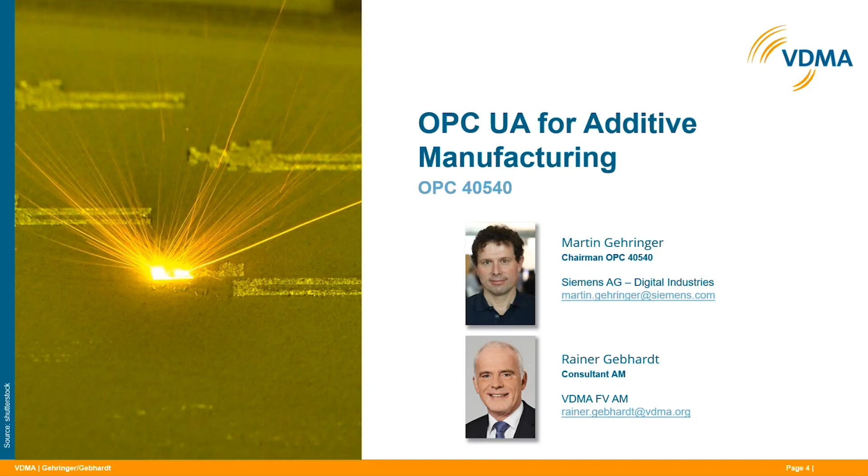Our agenda for today: the first part, my part, is the introduction to additive manufacturing, some short insights. Many of you are familiar with this topic, but perhaps we have an overview just to see again what's important. Then allow me to introduce our working group within VDMA, and then Martin will present the details about what we have done, why OPC UA, what the specification is, and the different topics we have. At the end, a short conclusion and outlook, and we are happy to continue with the discussion together with you, question and answer. Götz is also with us here as someone who has much experience with OPC UA.

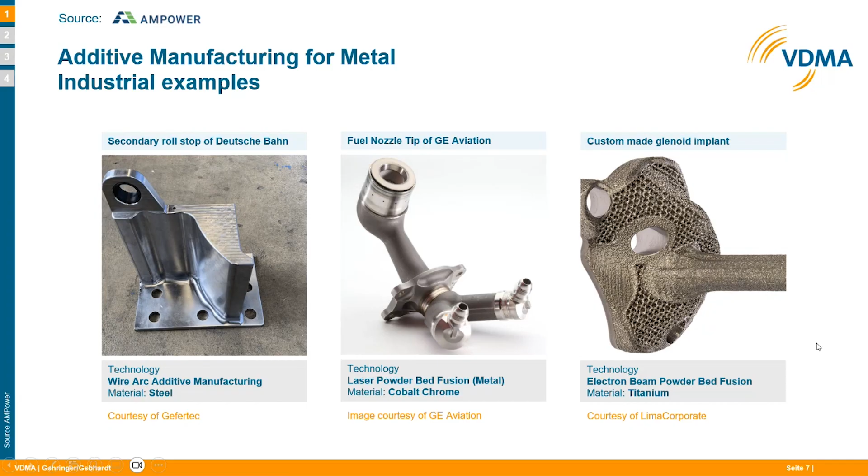And these examples were all produced with different technologies. In the plastic production, it's similar. They have different technologies. Also, the powder bed fusion. In this case, it's a little bit different because you melt and merge the particles. It's not as much energy as with the metal, but the same principle.

And then the material extrusion, very well known with plastics, and different variations, like from Arburg, where you use not a filament, but you use granulate, and you add only droplets on the surface of your part to build up the geometry without any tool. And material jetting is very well known. It's an inkjet principle to build up, often with a UV curing system.

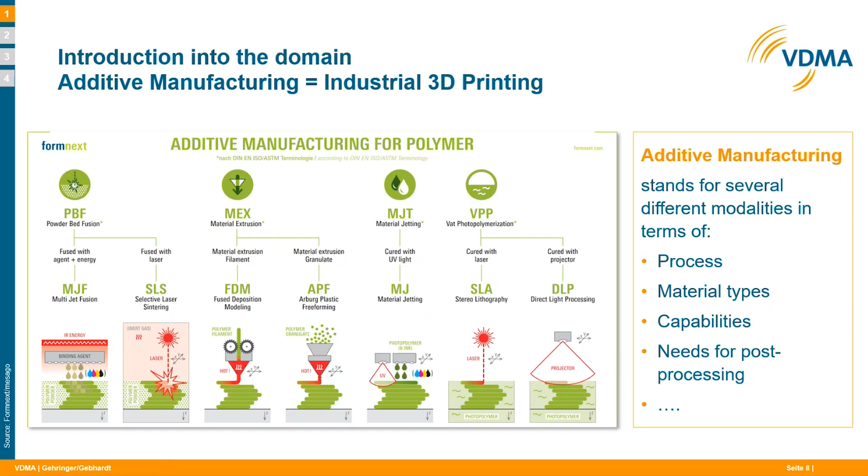Vat polymerization, that's the UV system with the photopolymer curing by laser energy in the wavelength, or even with direct light processing, meaning a continuous process where you build up droplets, or in this case, inside of a whole volume, where you build the part by adding this energy by UV light.

And the examples you see, plastic has a wide range, perhaps even you have at home, but this is not the point of industrial production. But eyewear, for example, is a typical example for personalized, customized products. And this is a very good possibility with laser powder bed fusion to build personalized eyewear, which is really added value for the business.

And the example in the middle here, this coupling hub, a part with mechanical function. AM is used because only a small volume of these parts is necessary. The tool for production, an injection molding process, is expensive, so additive is a good solution. And at the right side, this solution for ship dashboards, which is normally designed in a flat panel. This is also adapted to the real needs of the customer. And this freedom of design with additive manufacturing is the reason to use it.

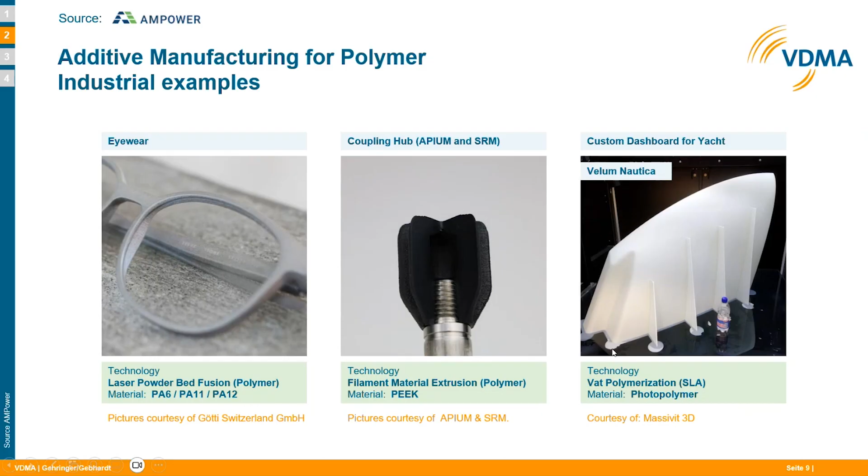Yeah, and I've been in touch with AM for 10 years, and we are doing it within VDMA. And what we see is, okay, the industry is growing, but there's really a big difference. You see prototyping without molds. Yes, it's an improvement for research and development in the industry, very successful, and often the door opener to be in touch with the technology, but it's not serial production, no volume.

Manufacturing tools, there you have a real advantage, because much more performance and quality is possible using AM technology. But more and more we see, and we hope it will grow in the future, and we need automation for this, the production of spare parts, digital warehouse. For example, Deutsche Bahn is using this, it's growing this business, and surely improvement of products and performance by functional integration, for example, flow optimization, process technology.

There are so many solutions and so many things which at the moment are not really used, but we hope and we are sure that this will be the technology for the future. So the transparency, which is written here, of the added value of using AM is necessary for the success and the industrial use of the technology. That's why we present the technology everywhere we can.

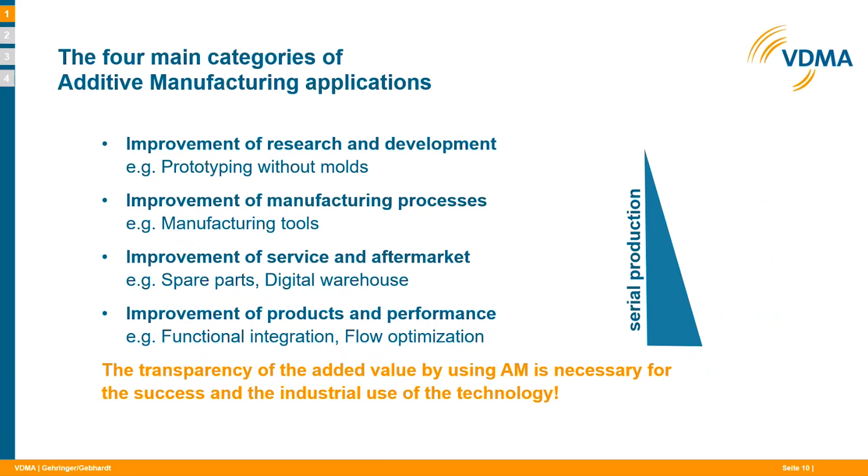Yeah, so just have a short look at our working group within VDMA. We started 10 years ago, as I mentioned. We now have more than 200 members in our group, really representing the whole process chain. We will see it on the next slide, but it's so important to understand that there are different technologies and the possibility to use different materials. You need the suppliers, you need the partners just to realize it. And so this network in a group with all these participants is very important for success.

Our main topics are on the industrial use of additive manufacturing with our mechanical engineering companies within VDMA, but surely for our companies to use it in their production of machines and their design, to understand what's possible. So the working groups are focused on industrialization. One part of this group is OPC UA, or quality and standards. Looking at sustainability, a very important point, the possibilities with additive to produce lightweight parts.

That's very important. Surely we need training, we need education for young people to understand the possibilities and to think additive. New markets and new applications. The visibility and networking with the industry as supplier and user of the technology to have a growing awareness and acceptance of AM.

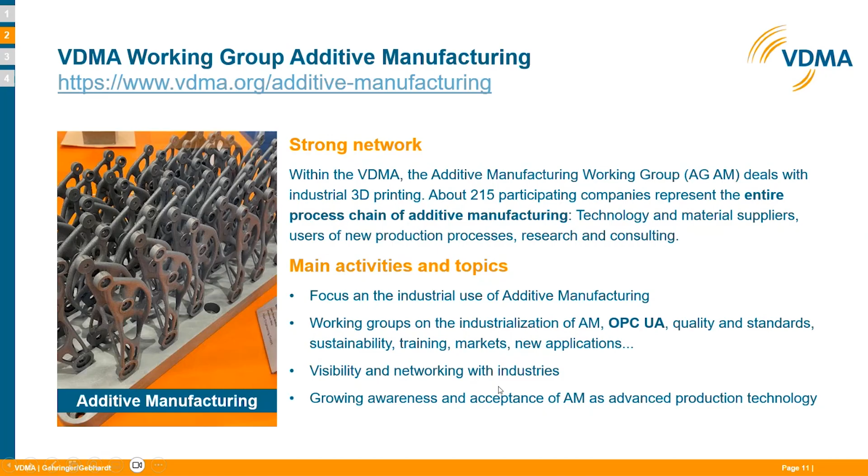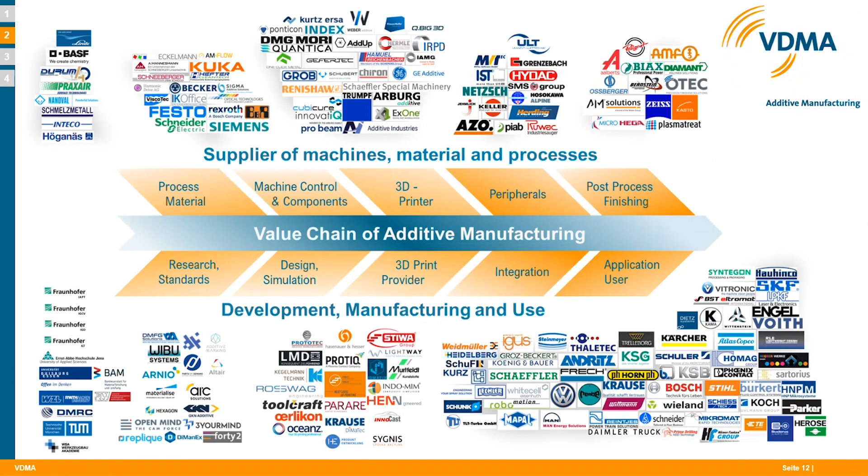This understanding of the process chain is important for industrialization. We are working in one group together - Martin is also with us in this group - with the aim to have a smart factory with AM, an intelligent production chain where you start with the idea of how to use AM, the concept, and then optimize the pre-process, meaning design, for the best way to produce, because sometimes you have support structures or several steps in post-processing. You even have to optimize the additive manufacturing process itself to get the best quality and result.

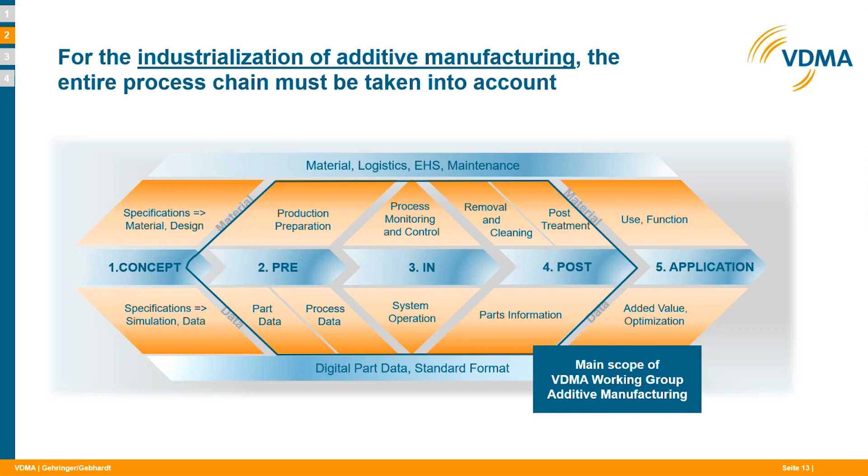Then the post-process, where we need automatization - often it takes the same work time as the entire AM process. And then there's the understanding of the applications and the potential of how to use AM. So this is our message, which we transfer to our companies: understand AM and use it in the right way, in an industrialized way, meaning quality and volume.

So I would like to hand over to Martin, because now we are in the next part of the presentation: why OPC UA. I hope it was possible to give you a short insight into the technology and how we work together.

Thanks, Rainer. Yes, so after the introduction and some examples in the VDMA working group for additive, we want to look deeper into the main topic for today's session, OPC UA for additive manufacturing. And here the starting point is why that is a topic, or becomes a topic.

As shown, additive manufacturing technologies are more and more applied for really printing end parts, which are part of products in the end. This means it becomes a real production technology which has to fulfill all the same requirements as conventional production technologies - so integrating machines on a shop floor, on a brownfield or a new greenfield, is something that has to be supported. So data integration must be as easy as possible.

Currently, the additive manufacturing machine-to-machine communication, or also the connectivity to MES or cloud systems, is driven by proprietary communication. Each vendor brings his own communication method. Some of them are already using OPC for communication - they have their own server model, their own information model. So in the end, they use the method of OPC UA for connecting and sharing or exchanging data, but everybody uses his own information model.

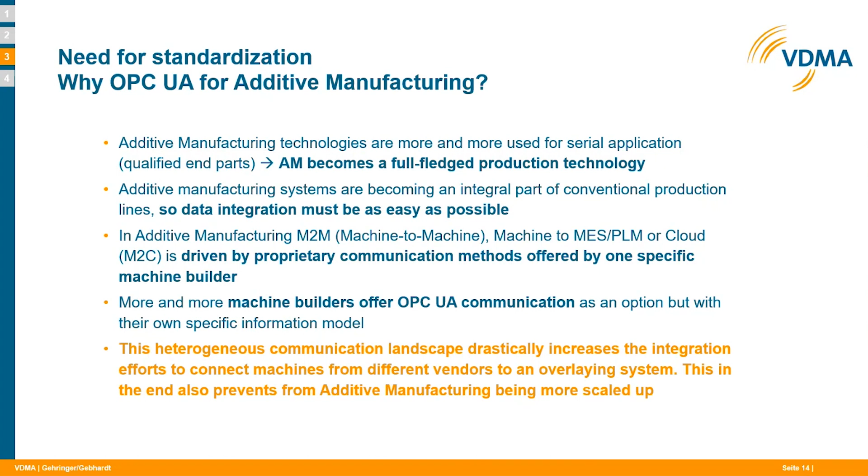Where did we start, and where did we locate OPC UA? Here you see the overall context where it is placed, where it's embedded. We started with the standardized approach based on OPC UA for machinery. Since several additive manufacturing machines have a machine tool-like kinematic and operate in a quite similar manner, we said it makes sense to use the machine tool specification too, where Götz is the chairman for this topic. He's also part of the meeting and supported us a lot in working on the first version of an OPC UA companion spec for additive manufacturing.

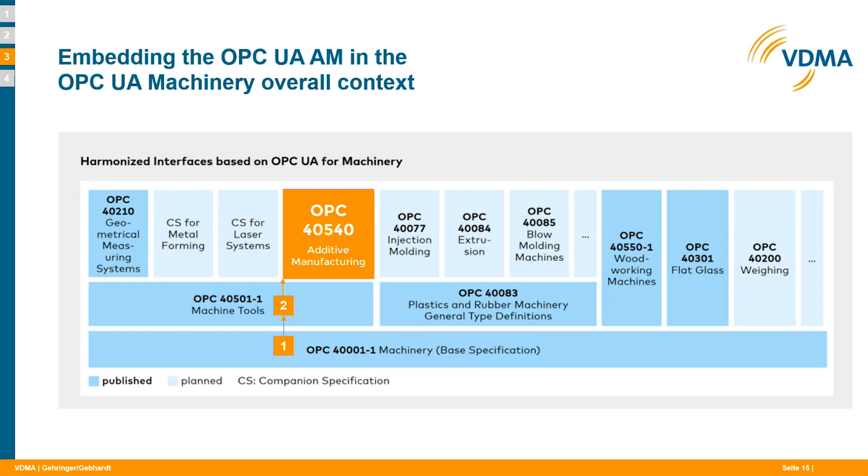So this means we embedded the activities in the existing landscape of OPC UA for machinery, utilizing also machine tools, and based upon that we build up our additive manufacturing specification. And there we go into some further details.

So we have a release candidate. We do not have a released specification yet. We worked on a first release candidate, and I'll give you some further details on where we are and what comes next later within this presentation.

But first of all, we looked into what are generic use cases we want to support. You can support a lot of specific use cases which vary from technology to technology, so in this phase we concentrated on quite generic topics relevant for all technologies shown. Due to this variety of technology, it's not so easy to select generic ones.

So machine identification - what are the properties, what are the capabilities, and so on, to see what materials can be performed, so that you can easily get information from the machine on the shop floor. What kind of machine is it, and what is it capable of?

The next thing is like monitor machine condition, sensors, indicators, production operability. And one big topic is also materials and consumables.

Typically, you have different feedstocks - one really for the part, the other one maybe for supports. This means it's about what material is on the machine, what consumable is on the machine, the consumption tracking, and so on. And also the related availability - is there enough material in the machine? Is there enough consumable there?

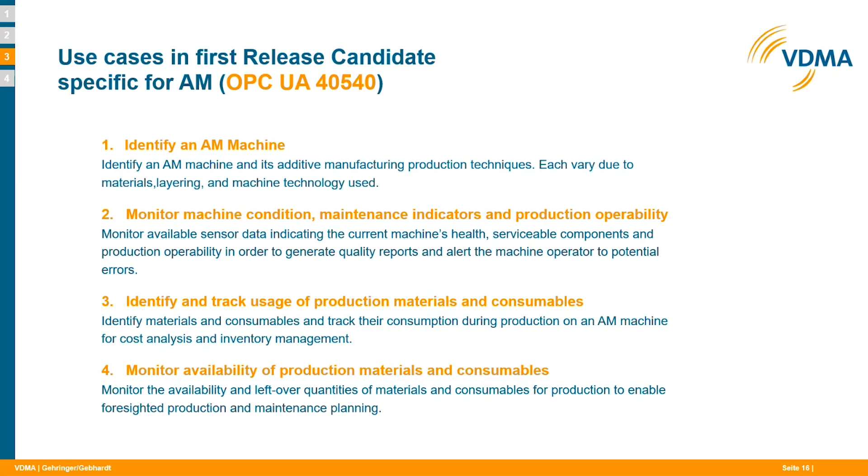And besides that, we also make use of machinery use cases described or defined in the OPC UA for machinery, like machine identification, machine monitoring, and so on. Besides that, we also make use of the machine tool spec, and the additive manufacturing type is somehow built upon the machine tool type.

And one big topic which currently stopped us from finalizing a first candidate for release is the job management, which we also want to refer to based on the machine tool reference - we integrate the job management directly, or make use of it, in the additive manufacturing specification.

But this job management was revised, and it was released in May this year. And based upon that, we will also revise again - that's currently work in progress - the specification for additive.

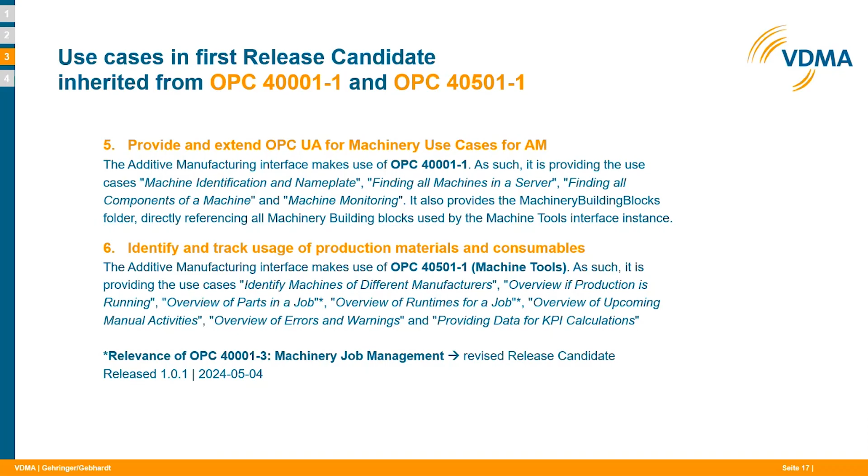So what happened so far, and where we are at the moment, what comes next in terms of OPC UA. I will not go through all the points. I think the main topic that...

Rainer mentioned already, it was triggered by discussions in the working group, where we said standardization on data integration is helpful for the further scaling of additive manufacturing, and also for the smart factory approach that Rainer mentioned.

So this means we said this is a topic, and a smaller group out of the overall working group came together, and we worked on the first idea of what could be the main use cases to address in the first specification. We started with the specification in 2021.

We got an official working group in 2022. So you find here the link where you can find the working group details.

And then we also make use of the umati platform, or umati context, which is promoting machine tool specification mainly. And we also work together with a machine tool colleague, as I mentioned already.

About 1.5 years ago, at Formnext, which is a main fair for additive manufacturing, in November, we made a first promotion out of it, using umati as the marketing and starting platform.

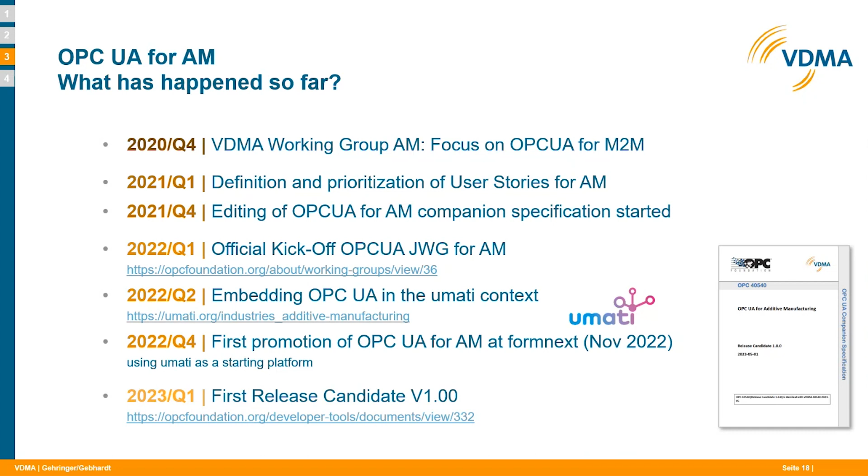It was stopped because the release is pending, as we waited for the new machinery job management definition. This is now released, as I mentioned already. And this started us resuming the activity with strong support from Götz, supporting us as an editor, since the original editor left the group.

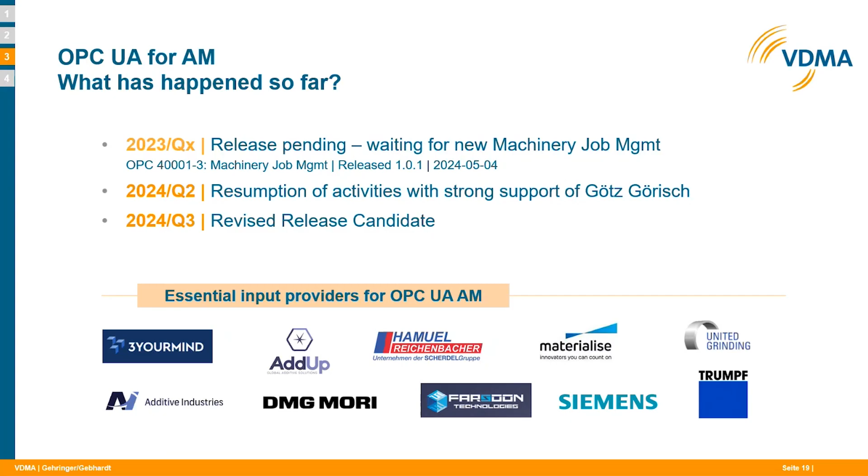As I mentioned, out of the group of the additive manufacturing working group from VDMA, several companies were engaged in order to build up a first specification. You find here the logos behind. It was not a continuous working group where every time all the members were with us. Sometimes maybe the one or the other stepped in as well, but I just mentioned here the main companies which also help promoting the standard in Formnext already.

Good. So I would go a bit deeper in what is needed, what you get, what you need in order to do the implementation. So this is not published yet. You find all the node sets which describe the information model for a specific specification on GitHub. Here you find the link.

Our OPC UA for additive manufacturing specification is part of the overall landscape and makes use of underlying specifications already, so you need a number of node sets already to start with. If you have the first release candidate, which I base my presentation on today, the orange marked node sets are needed in order to start.

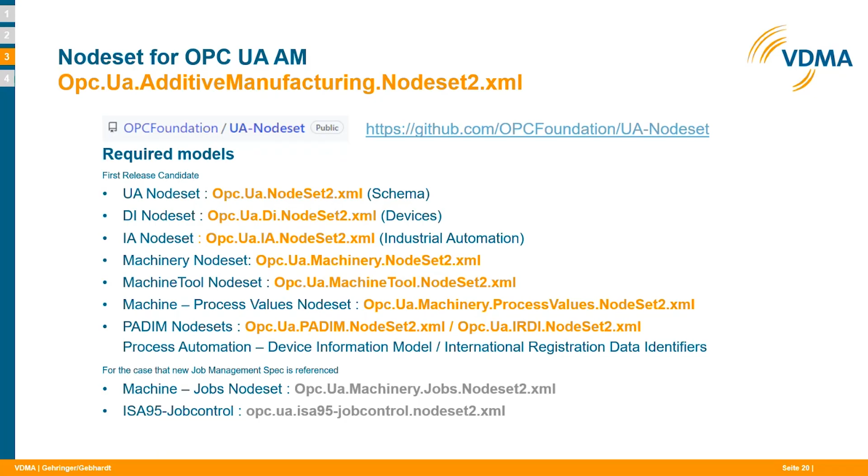In future, when hopefully the first approved release candidate comes, the job management spec will be referenced as well, and for this, 2 additional node sets will be needed.

So what do you need to do in order to do the technical implementation? If you are a machine builder, it's your goal in the end to provide an OPC UA server which makes use of the additive manufacturing information model, but of course you will also have your own nodes, your own variables, your own methods, and so on that you can add for your specific machine. So the goal of this OPC UA for AM specification is not to cover all information model aspects of the additive machine, but starting with a base that is the same for all machines.

First of all, you need the node sets, which you can download from GitHub, as mentioned. You need a modeler. There are some mentioned. I will later use the Siemens freeware called SiOME, just to show some practical steps of implementation.

So the first thing is that you have all your necessary node sets. You load it into a modeler. You generate a new instance. You use the additive manufacturing machine type to build up your machine. And then you can also modify that type in order to generate your own information model. After that, you can generate your OPC UA server.

There are different ways to do it, different software options. One is mentioned here, the open62541 library. It's also possible to directly make use of it. For example, if you have a PLC controller, where OPC UA is offered by different vendors, you can directly use the OPC UA server from the PLC in order to model or implement the additive manufacturing information model.

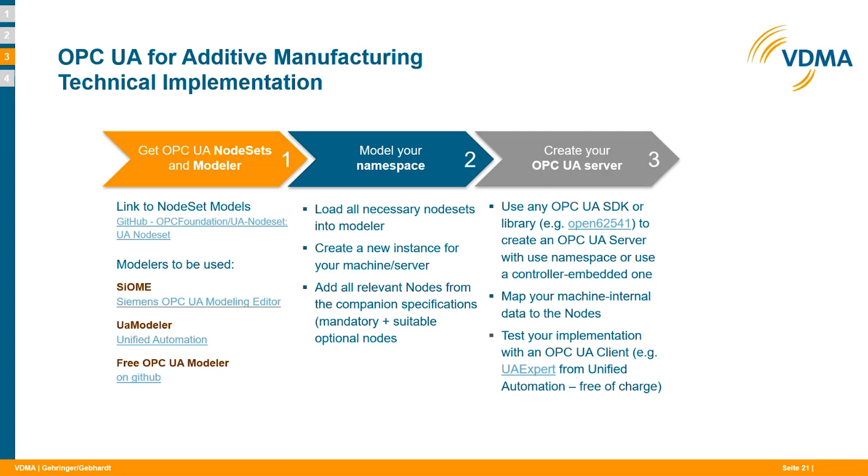So with this, I would like to change to a very short live demo. I just want to give you some brief insight in how you work with it. Many of you might know that already, but if you're new in the OPC UA space, maybe that helps you understand how you need to move on.

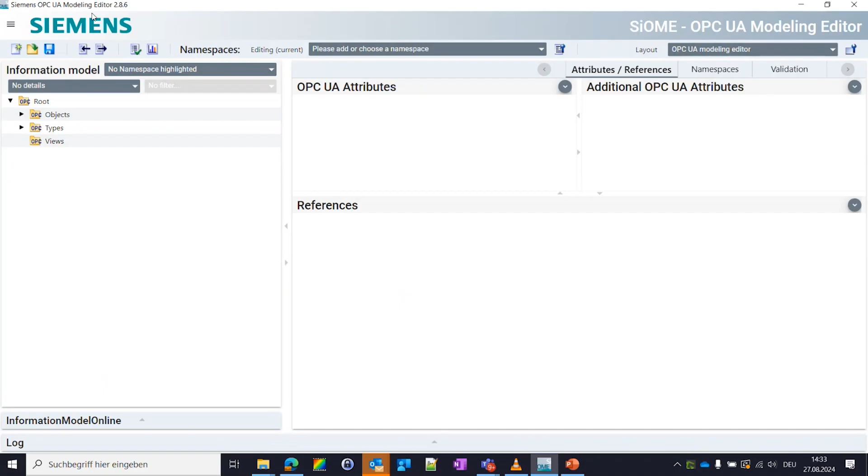For this, I changed to the editor, which is SiOME, which stands for the Siemens OPC UA modeling editor. And you see currently there's no namespace in. If you go here, there's just the namespace. This is the UA namespace, the standard, which describes the basics of OPC UA.

As first step, as I mentioned, you need to import all the namespaces. You can do it at once, but in order to show it, it's quite a number. So the first one is a standard node set. You see that's the newest one. It changed from 1.4 to 1.5.

The next one would be the DI node set, and I'll go quite fast. The machinery node set, industrial automation node set. Then the machine tool node set, then there are some going around process data. These are these two ones.

Then we go for the machine process values, and in the end, these are all the preconditions. I mentioned that with the final, there will also be the job management node sets. I just show it to you, but the one that is now really showing is a result of the work we did in the working group so far. That is the OPC UA additive manufacturing node set.

You see that it is already quite old, and this was generated in parallel with the first release candidate. So it's from 2023, but it will not be the one that will be published finally. But I start with this as well. So you have these different namespaces included. And when you go on the left side, you see that the information model is there.

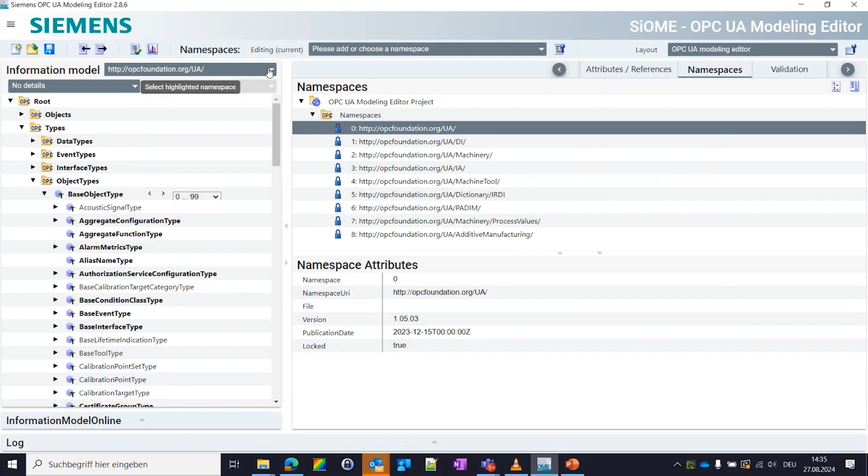For example, if you go for the object types, you see a base object type, and this includes all the different types that can be addressed, that can be used. And here you can select which information model brings what kind of type with it. And if we go for the additive one, which is the last one, you see it's not a lot. There's something about consumables, so about materials and production runtime.

One main thing is the machine tool type includes a new child, which is the additive manufacturing type. And this is the main type now to build up your own machine instance. So the additive manufacturing machine type has the consumables, materials, tools, and so on. I will make use of that. So how to make use of that? I go back here, you see all the object types which you need, which are the references you will use in your own object.

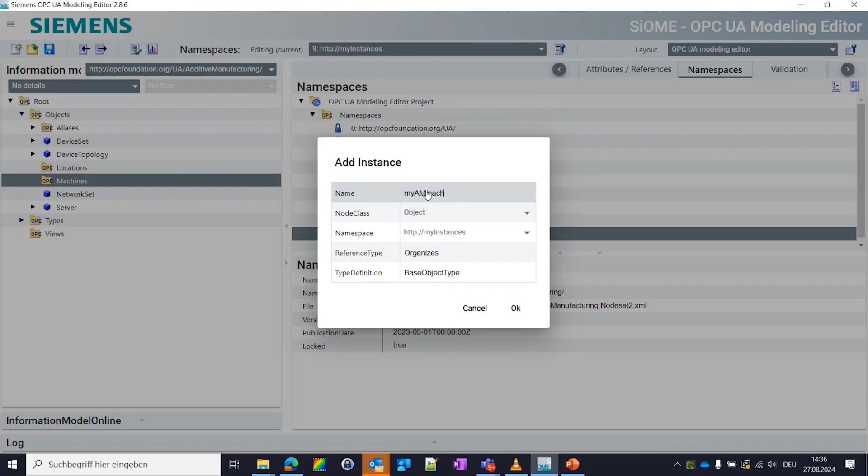I go to object machines, and with this I can start a new instance. New instance means I now make use of a type and adopt it to my own needs. With this I would start a new namespace, just call it my instances. And as a name, maybe my AM machine, and here I go for the object type. And with this, I would use the additive type directly. You see here, it's an own namespace and it's an own type, which comes from namespace 8. And namespace 8 was the one that we had as additive manufacturing.

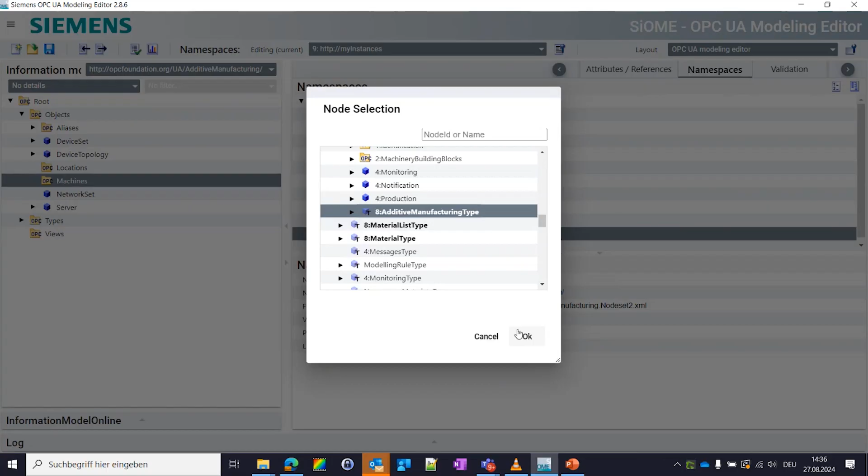I start that and I now get a new machine here, which already brings some properties with it. If I go, for example, to identification, you see there's the AM technology and identifier. Go to attributes: there's the manufacturer, the product instance URI, and the serial number. But if I go for identification as a whole, you see there are many more properties and variables there. For example, the hardware revision would be a topic that comes from machinery and so on.

You see here with the number from which specific namespace this is inherited. So this is from the machine tool type. This is also from the machine tool type. And you could use them as well. So you can use them and say, I add this because this is what I would like to use.

But for mandatory things, you see here, mandatory is not a lot. Mandatory is the serial number, the product, and the manufacturer. With the mandatory, you find the information in the specification, which variables we see as mandatory to be filled, that everybody using the additive manufacturing type has to fill. So this is just a short glance at the namespaces and also how to set up an instance.

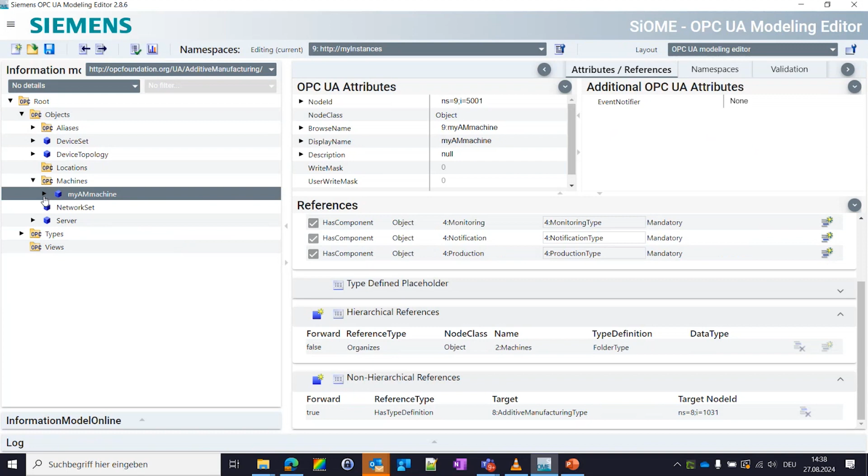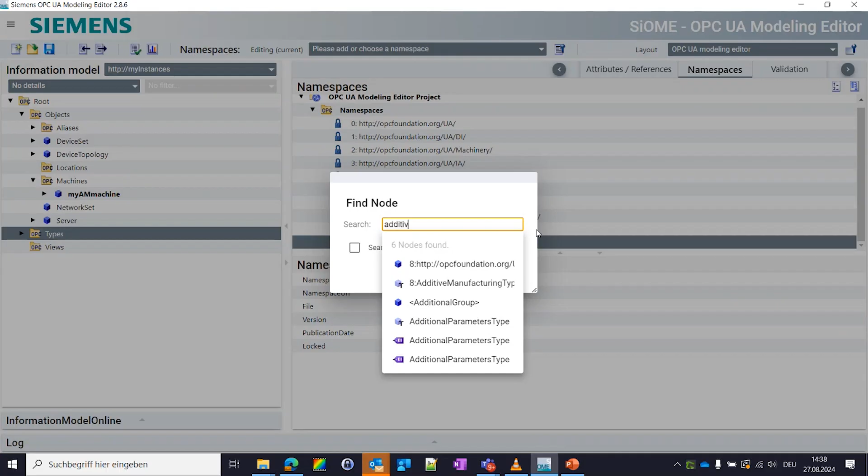And I want to just add one more thing. I go to the namespaces again. I'm going to close that or lock that, and go back to the types. Look again for the additive one. You find here the additive manufacturing type. Go there again, and this is the type as you get it from the standard namespace.

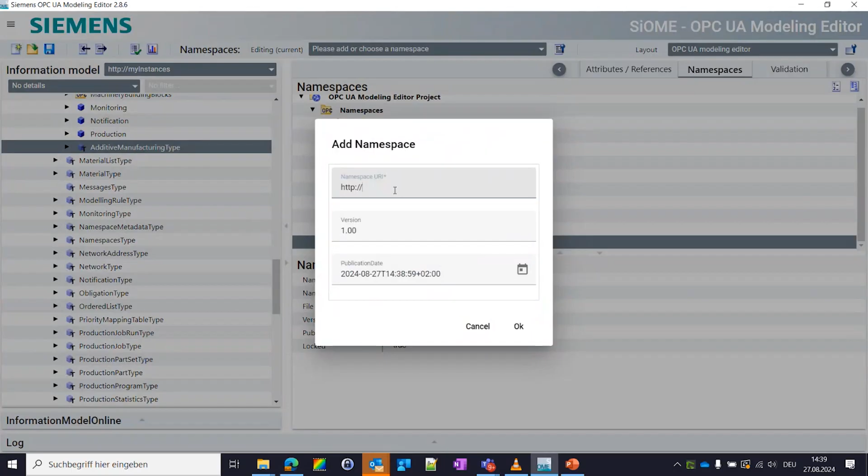What you can now do is make a new object type with a new namespace, and I call it vendor AM namespace. So this is where I now make use of the existing type. I generate my namespace, and this would be the vendor-specific AM type.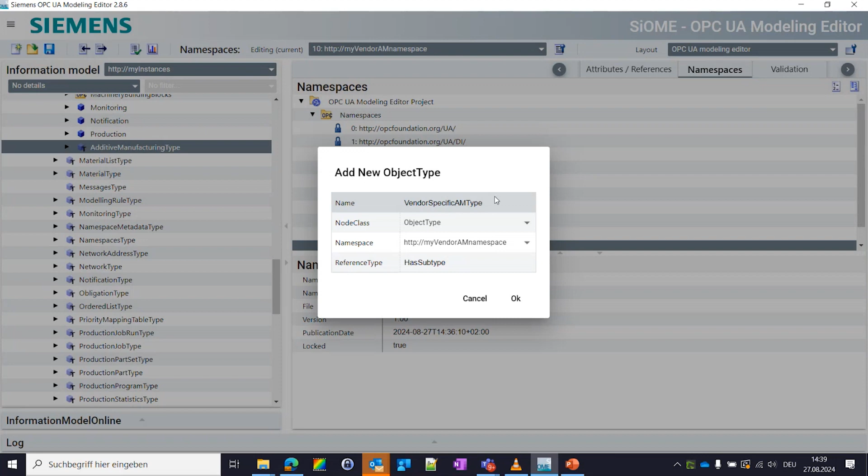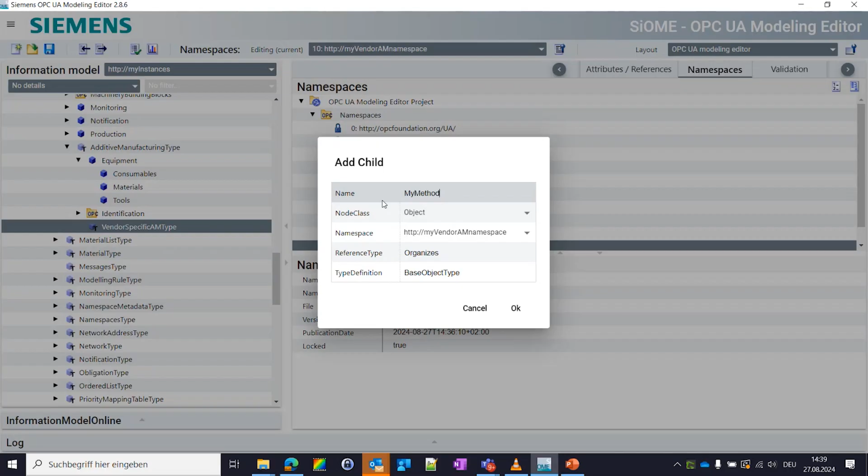Good. So with this, you see, you have the vendor-specific AM type, which is under the additive manufacturing type. And here, for example, you can add a child and say, now I add something specific, like my method. I add a method and say, okay, a NodeClass will be a method, and add it here. And with this, I can say now, okay, I put in the input arguments and so on.

I will not proceed here because of time, but the idea is that when you now start a new instance over there, you can then use not the AM, the additive manufacturing type, but your vendor-specific one. And this makes you capable to say, I make use of the standard and add my own variables. You can add everything here in the vendor-specific AM type, which is based on the standard one, but with your own childs, which you can make use of.

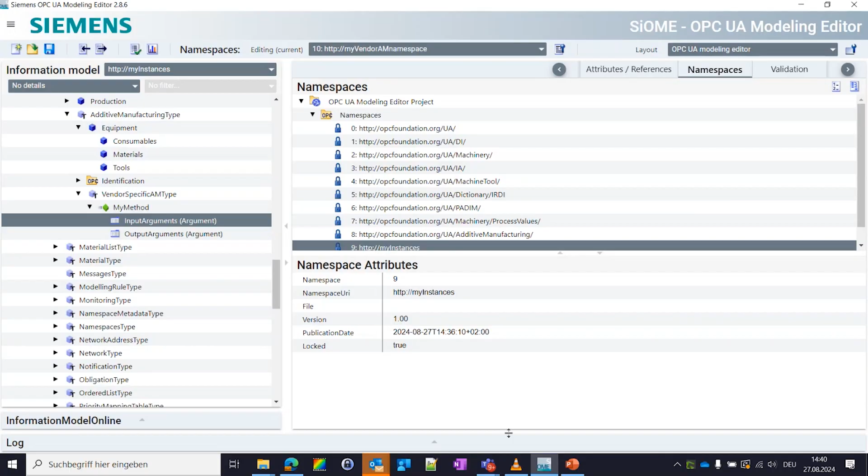So that's just a short glimpse into what you can do and how you do it. And to be honest, I'm not the OPC modeling expert, so it's just some basics I would like to show within this presentation. I go back to the presentation. In the end, you generate your own namespace, you export the namespace, and then you can use it to really implement your OPC UA server.

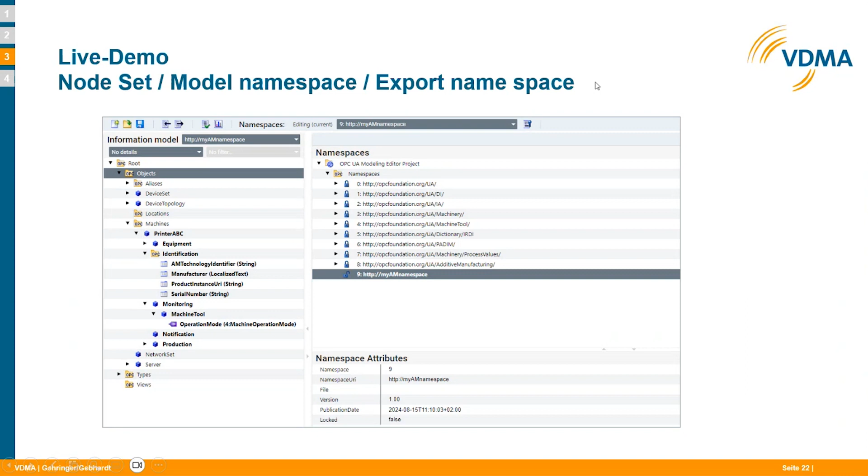But I don't want to only talk about the implementation, but also about why it makes sense. I think there's no doubt it makes sense to have a standard, but we also face some barriers to adoption. We don't have a released standard specification yet, but nevertheless, we see that due to the large variety of different technologies, it's not possible to really map the technologically relevant parameters in detail in an overarching specification.

For example, an end user using a laser powder bed fusion machine would be interested in the current laser power, which makes sense because with this, maybe you can see what's happening there. But this is very specific for one technology, and in another one, it would be a filament or whatever. So far, in order to make it simple, we keep it very generic on the one side, which is a benefit for easy adoption in the first phase. But on the other side, of course, it's not really fulfilling the needs of all end users. But it's a matter of time, and based on the selected AM technology, we could detail the information model even further.

Nevertheless, from my personal experience in the additive industry in recent years, and also what I see in the additive manufacturing working group of VDMA, so far the pull is not really strong. What I mean with pull is that machine end users are not really pushing the machine builders, not requesting from the machine builder that they want the standard. So in the end, the machine builder can offer what he wants. If he offers a good interface, the end user is satisfied. He doesn't really care whether it's with OPC UA, or whether it includes the standardized information model.

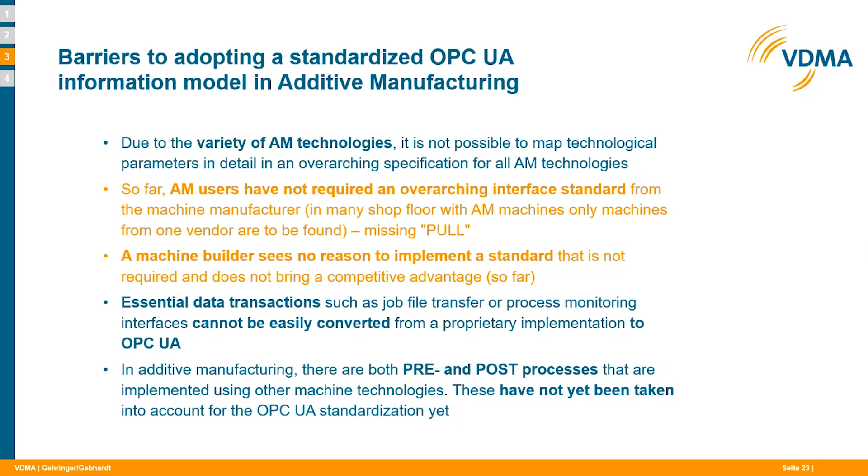So nevertheless, I think that's not an argument. I'm not against the standard, but it's more to make you aware that if you are an end user interested in a standard, you also have to request it from your suppliers.

Why we continue, and this is what I mentioned a bit already. Of course, a standardized model makes sense. Also for relevant parameters like quality data and process performance, that helps the new manufacturing technology become successful. The additive manufacturing types contain the basic data. Still, machine builders can add their own part. The scope of standardization can and will grow over time.

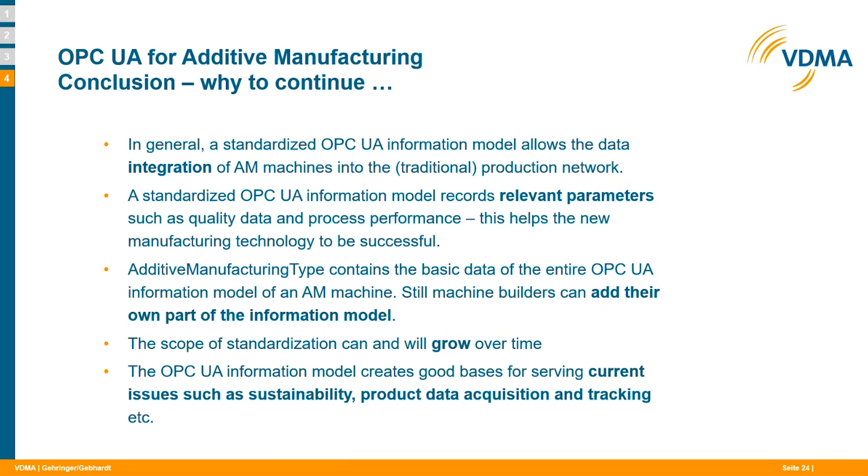And overall, I think a generic information model is a base for serving current trends and issues, with aspects on sustainability, on tracking, on product data acquisition, and so on. So with this conclusion on OPC UA, I hand over to you, Rainer, again for the outlook.

Thank you, Martin. Thank you very much for showing the example of how to work with a solution and all these details. So just this last slide about how to continue, what's next. Martin mentioned different aspects, but the finalization of the next version of the spec release candidate is important for us. So we take into account review comments and integration of revised job management. Yesterday we had a meeting, not finished, so we'll continue with it. If you are interested, please let us know.

This is in process. And publish and promote OPC UA for AM in the AM industry. As Martin mentioned, we need these industrial users, this industrial application, and for this, it has to be well known, and we need companies that want to use the system. Implementation of the spec with the AM industry, based on the experience of the other OPC UA groups.

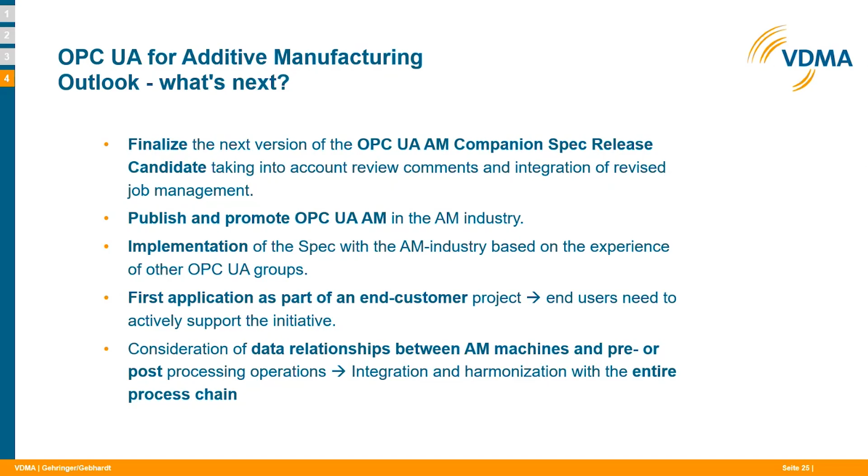This is really necessary. So I think this is our last slide for the presentation. We thank you very, very much for the attention.